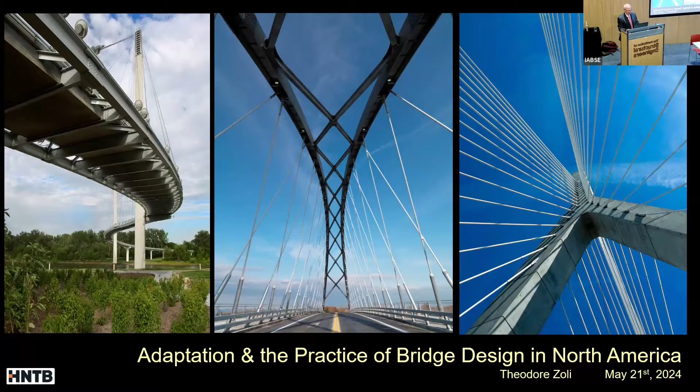I'm also going to go off course here a bit in terms of thinking about what I mean by adaptation. For me, I got fascinated by this idea that we could use evolutionary models to think about technology, and in particular to look at artifacts. So this is the idea that maybe a bridge is an artifact, and look at how those artifacts evolved over time and what that means.

In the biotech space, obviously, especially with genetic algorithms and actual genetics, they think a lot about how to do this in a slightly different way. This sensibility about a fitness landscape and climbing a mountain to get to higher fitness is at least a metaphor that I think we can adapt.

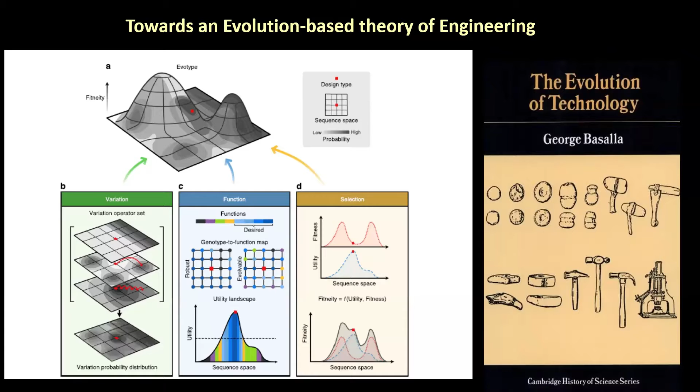And maybe this is the strangest part of what I'll have to say. So one is this idea that the mountain keeps moving, and so how well adapted are we if we're trying to climb the mountain and the mountain's moving out from under us? There's also this sensibility about Rogers' paradox, and I'll use these words interchangeably. But there's this idea, and the paradoxical part, is this idea that there's some equilibrium.

If the environment changes, and this is just an X-Y change in environment, you have learners who are adapting to what that change is, and you have imitators.

So this idea of learners, you can think of interchangeably as innovators, and then imitators. It's a way of thinking about cultural transmission. In this sense, I think the cultural transmission part is really important. How do we choose good ideas and then reuse them?

So I want to highlight where I've been both, I think, a bit of an innovator, but also a bit of an imitator, and I think both are equally important in some sense. I'll try to walk through that in a way that I hope makes sense.

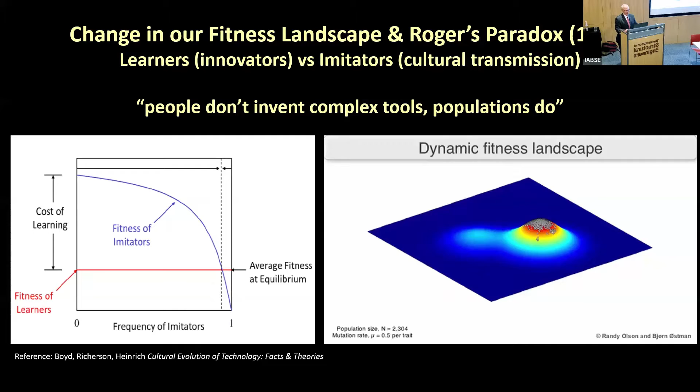The other challenge for me is that, this is not in Stuart Kauffman's model, this is a sensibility about how the fitness component depends on multiple categories or multiple other components. So if they're not independent, then you have this problem of figuring out which space you should be headed towards. And obviously, if the space is changing, it makes it even more complicated.

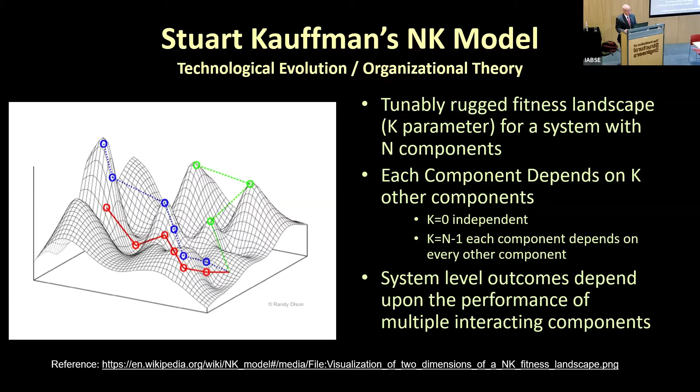I want to argue here that I see really two slowly changing landscapes that have been the focus of my career. And one is, when I say slow, I'm talking 100 years, more than a generation. The length of the artifact, the service life of a bridge, is the way I like to think about this.

So I would say 100 years ago or better, the thing that drove decision-making was primarily cost. Certainly not safety. We had many collapses per year with many deaths. Certainly not longevity. Many bridges lasted less than 10 years. And environmental impact, I think, was not consequential at all at the time.

And I say 1980s to present just because that's when I've been practicing. Safety has obviously changed dramatically. Safety and cost, I think, are still the largest drivers. What's changing right at the moment is environmental impact or sustainability, however you want to think about that term. So I'll focus quite a lot on safety and cost and how to get there.

Now, for me, cost is underpinned in terms of what's changed, and also slowly changing, is that materials were the primary cost 100 years ago, and now they're not even a third of the cost. I've gotten agencies and even the steel manufacturing industry and the concrete industry to crunch numbers on this, and it's absolutely clear it's maybe one-third or less of the cost.

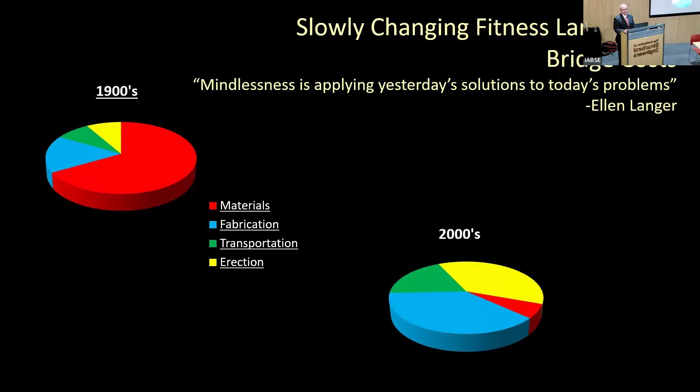At any rate, I spent a lot of my career not optimizing for materials, actually optimizing for the opposite of material costs. So that's been maybe an underpinning. And then it always bothered me.

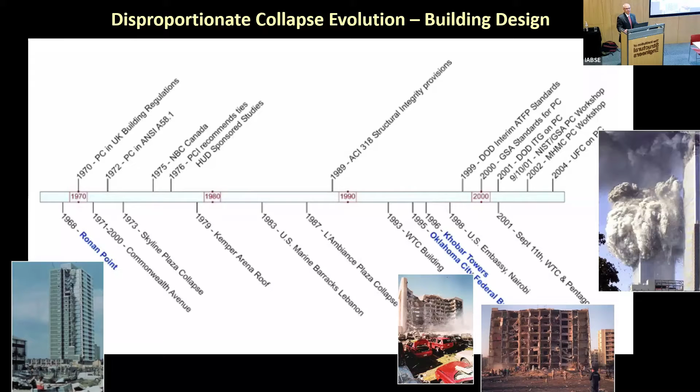Speaking here and thinking about the Ronan Point collapse and progressive collapse in buildings, I'm really a product of September 11th in terms of my generation's practice. And yet these are all buildings, and we still, as of today, don't really have progressive collapse guidelines or disproportionate collapse, as you say here, in U.S. practice.

And it's funny because we've had exactly the same collapse history in bridges as we've had in buildings. We've just somehow called it something different. So when I started my practice, I really was concerned about why we don't have progressive collapse guidelines. Why are we designing bridges where we could have one component fail?

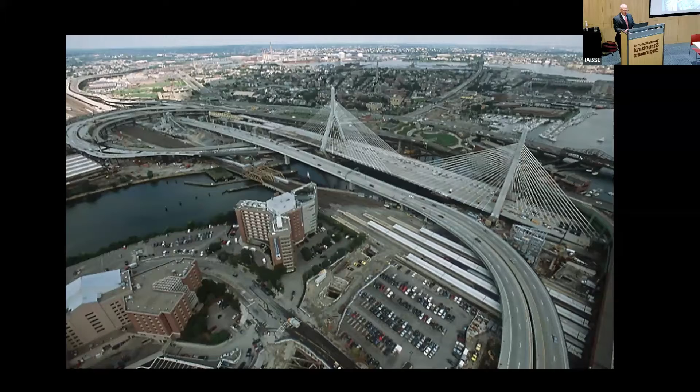And so now it comes to the formative beginnings of my career, and some of this will seem a bit strange, I think. This was a project in Boston where Christian Menn was the conceptual designer, and I was the engineer of record. There's maybe two or three important takeaways for me, at least in this.

One is the cable spacing was so tight that it was easy to tolerate the loss of a stay, perhaps even the loss of two stays. And this was just a choice, right? So this cable spacing is maybe 6 meters, the tightest cable spacing of any major bridge I've ever designed. Yeah, it's a strange idea.

And then maybe the other piece, and this is quite a mess if you imagine, right? You have a cantilevered walk, this two carriageway cantilevered bit, and you have then much more force in these cables than these cables, which produces obviously a lateral force this way, which wants the bridge to go to the left, and it also wants to pull the tower over to the right, and in this case, twist the tower.

So the one bit of cleverness here, I think, that no one will understand except a bridge engineer, is just by moving these two cables just an inch or two this way balances the forces, the torsion in the tower, the lateral bending in the tower, and minimizes some of the lateral bending in the deck.

Yes, so these subtle things I thought were fascinating, right? That you could play this game. And so since then, I think many cable-stayed bridges have taken into account that just a subtle change where you're directing very large forces can create quite interesting opportunities to, let's say, misbehave.

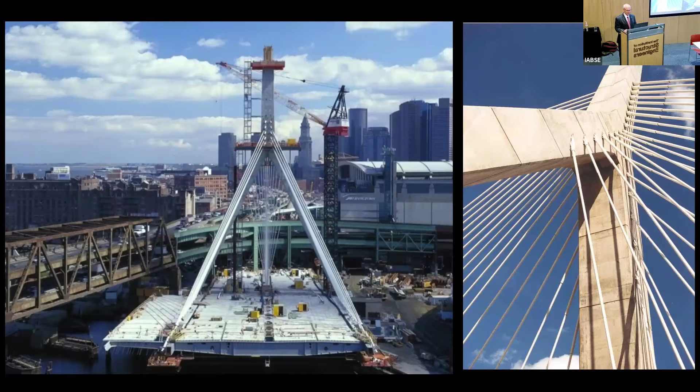But the real story here is what a mess this project is. We were building this cable-stayed bridge underneath an existing double deck structure, where the columns of the double deck structure went through the side spans, and you can see the cables. It's a little hard to see, but the cables extend underneath so that last cable almost hits - it's within 6 inches of hitting the existing girder.

So this bridge had to be built, and then the double deck bridge removed. We had to build a hole for that column and remove the column later, and so on. To me, there's something fascinating about this being an early part of the work that I did as a practicing engineer. It's a little bit like trying to build an automobile in your closet - there's just too much going on and not enough places to do it.

But it also gave me a sensibility about how critical a construction strategy is and how it should be baked into the engineering. A lot of what we changed, even in Menn's conceptual design, was to try to get this to work a bit better. And ultimately, I think it's a successful structure.

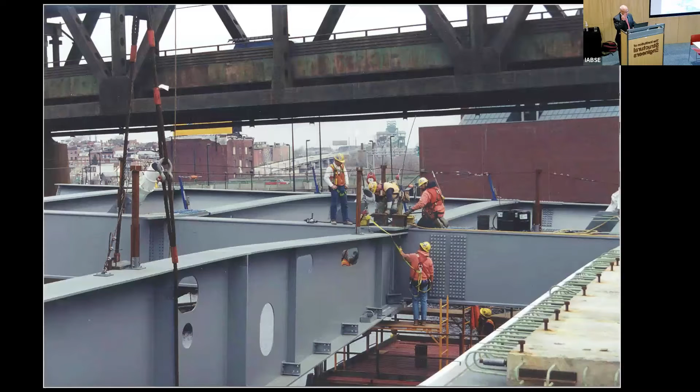But the other thing that it instilled in me, and this is something I didn't appreciate, was how much forcing it took to install some of these components. The cleverness of erection engineers in order to build this bridge was far more clever than anything we did in the design. That's something that stuck with me - I really had to be a better structural engineer. I had to understand erection engineering in a deeper way and really start to integrate the erection strategy into the design. It's a theme that I'll come back to.

So the other piece was one of safety. People would probably not recognize this, but only in the US would we say tied arches are not permitted. In 1978, we had some problems with some welded tied arches, and the federal government said, 'Thou shalt not build tied arches.'

And so I grew up in that "thou shalt not build tied arches" sensibility, and yet this particular crossing of the Ohio River really wanted to be an arch in many ways. It could have been a cable-stayed bridge, but for reasons that are historic, this island really couldn't be touched.

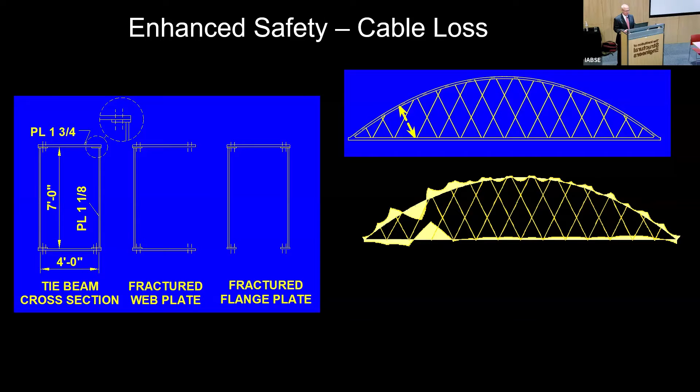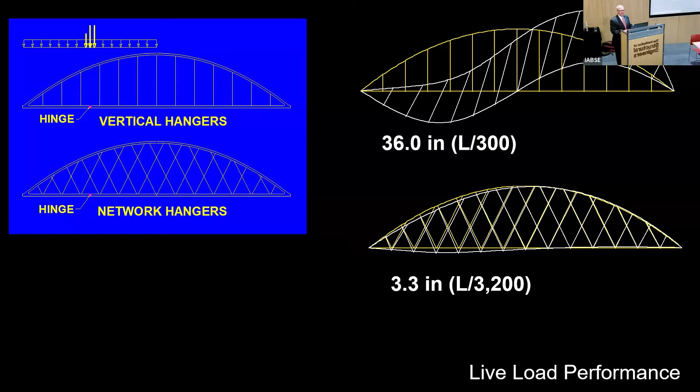And then, not for nothing, you look at the comparisons under live load, for example, and it's just dramatic. You have a system that is 10 times more efficient, whether it's displacements or moments. And you wonder, for me at least, how did we not find this system earlier, and why were we ever designing arch bridges with vertical hangers? Of course, it was found earlier, and I didn't realize this at the time, but Per Tveit, this little-known Norwegian, ended up as a professor, but he built two bridges.

The backstory on this is cute. His mom knew the Secretary of Transportation in Norway, and she said, "My son's got his PhD on these things that make no sense to me. You should let him do one." And I guess in Norway they said yes, so he did two network arches. Then he became a professor and didn't do much about network arches for 30 or 40 years.

And then he called me when he saw Blennerhassett. He said, "Well, how did you find my stuff?" And I said, "I didn't know your stuff existed." He said, "Well, what were you?" Because his argument was for slenderness, that you can make these very, very slender, and these bridges are extremely slender. And I was making exactly the opposite argument, about safety.

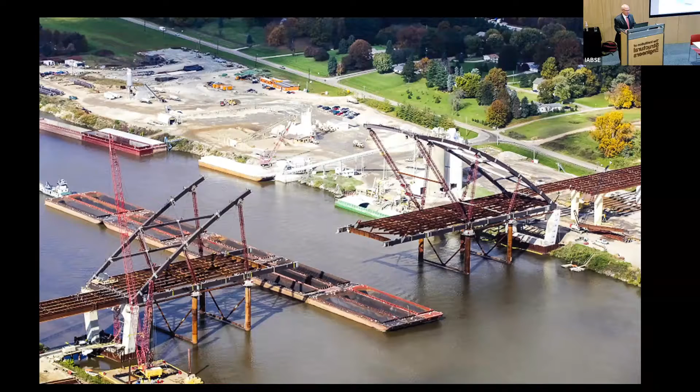But one other theme, and this goes back to really the appreciation for the erection engineering. This is another problem I have with arches that I'll come back to over and over again in my career: they're hard to build. The engineer who did the erection engineering for this arch designed everything, all of the temporary stays, all of these jackable struts. The guy was an absolute genius. You would never, in talking with him, know how much he knew about arches, but it was absolutely fascinating to me.

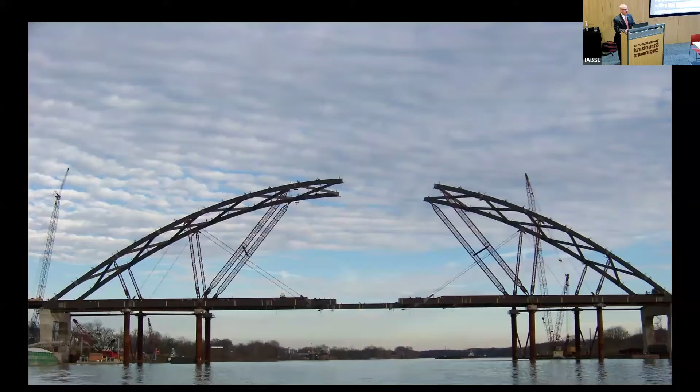But what's always bothered me is you look at all of these temporary structures, and this I think of as lost dollars. These are dollars that don't go into the final structure, they go into getting the final structure there. And when we think and talk some about sustainability, I don't think we measure these things clearly enough. So yeah, these I think are formative for me.

So then my argument here, it's a very simple one, and there's a few of my former students in the room who've heard me say this: for me, it's just optimizing for fabrication, transportation, and erection, with very little thought to material optimization.

And so then I went on a bit of a spree of taking over-budget pedestrian bridges and redesigning them for roughly half their cost. This is another thing that surprises people, that design can mean a 50% reduction in cost.

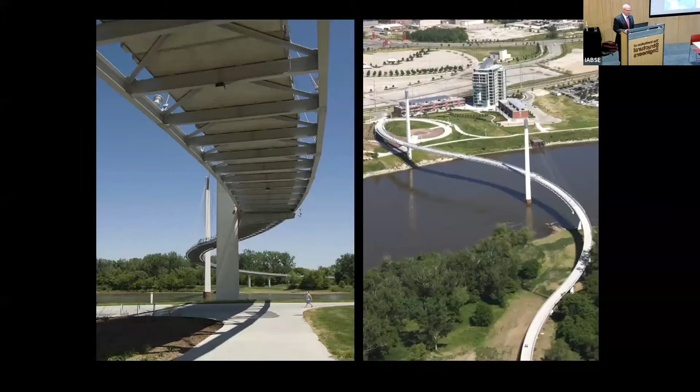These are examples of those three that I'll go through quickly. One's a sort of strange idea about a curved cable-stayed bridge, an S-curved cable-stayed bridge. Maybe that's not so strange, but I think in the way we achieved it. This was a design-build project, and it used the model of: we have $22 million to spend, give us the best bridge you can.

We were able to give them the bridge that was bid at 47 million. We gave them exactly the same alignment, a very similar bridge, but with some fundamental differences. The fabricator and contractor working had never built a cable-stayed bridge, and the fabricator said, I will not do a curved bridge. So the beauty here is there's not a single curved member anywhere on this bridge.

Then a bit about how we saved so much money. The original design had a single cell box, asymmetric cable arrangement, inclined towers, and even in the middle of the country—this is in Omaha, Nebraska—wind governed. We were able to use a section with much more drag but much less depth. Just in the foundations alone, we saved half the cost. Ultimately, this bridge was delivered very successfully.

But I come back to the 'no curved' part, and now you'll see the sensibility about erection. I wanted every one of these pieces to be exactly the same, and for there to be no stick framing. It's a strange idea, right? That piece has to be the same piece, and there can't be any little pieces to pick up. Little pieces to pick up is hook time—it takes a crane operator to pick something he shouldn't need to pick up.

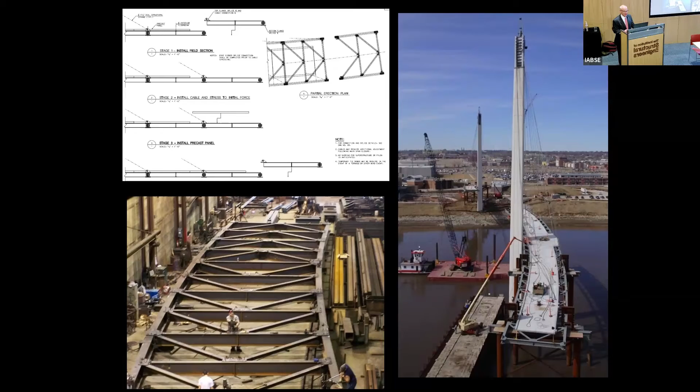So I started really thinking about how to make a piece that's erectable. If that piece is exactly the same—this is a pie-slicing plan—then every single one is the same. This becomes something the fabricator was very happy to do, and it was done very cost-effectively.

The other piece of this—Verlinger and I had a little discussion, he taught one of my classes, and I think he wasn't convinced. My argument on curved bridges is the tower belongs in the CG of the section. It's absolutely the only place where the tower can be vertical and behave just like a tower should. If you incline the tower, you immediately get a much more complicated set of circumstances.

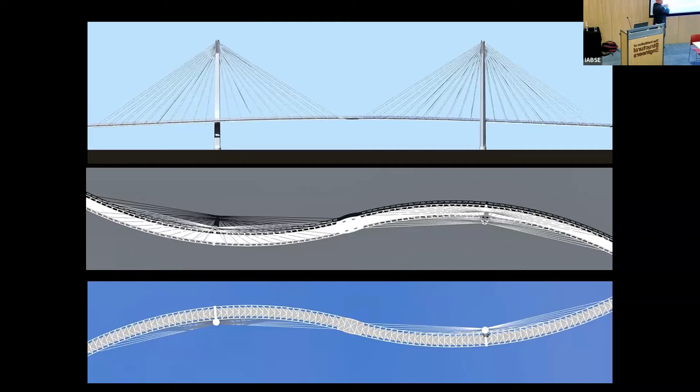The other thing is that this wants to close the curve, right? But it's easy to build the curve at a bigger diameter. This is a bit like the Zakum problem all over again—you can pre-build the banana slightly wider than it needs to be, and it ends up in the right place. But the real advantage in all of this, with a vertical tower and a quite simple foundation construction—no cofferdams, a single drilled shaft—is what really saves the vast majority of the money.

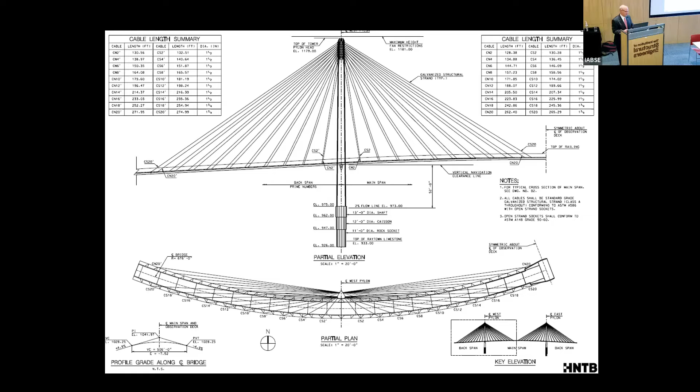So then another one is this classical problem of a bridge over an interstate. In the U.S., we found nice communities, and then we built 8-lane divided highways through those communities. The neighborhood is here, the high school is here. Instead of having a bridge—even the abutments were built for this—the bridge was never built. The head of the Department of Public Works had been trying to get this project done for his entire career.

The bridge was designed all in concrete, and it was twice the budget, so the project had to be canceled. He flew out and met with Les Robertson, one of the guys on the wall, and said, I want your ideas on how to do this, but I only have this much money.

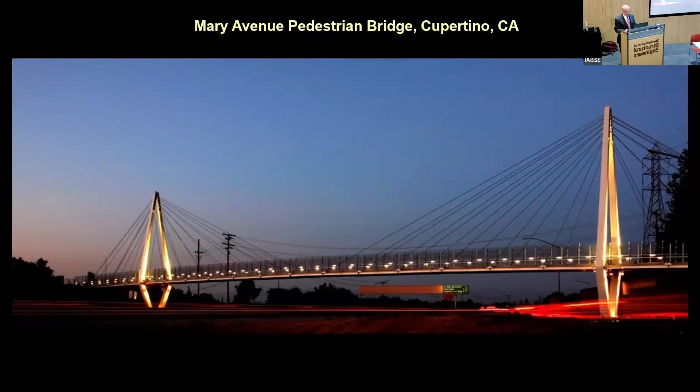The concrete tower schedule was 2 months to erect. This took 2 hours. So you get the idea - more expensive materials, maybe more fabrication done off-site, but this is the sort of thing you can do. For me it's a funny thing, right, since this is a high seismic region. The connections happen in places where there's very little movement, so I'm not too worried about that.

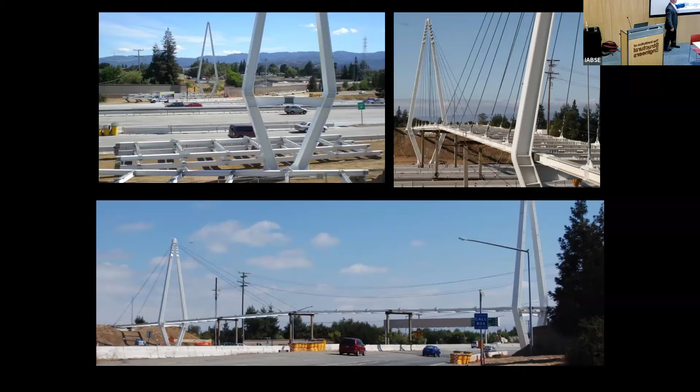But that's not the whole story. It turns out in this divided highway there were places where I could drop false work on top of barriers. So the bridge pieces are all the same, erected to span from false work to false work without the cables. Then it's built high and the cables are installed unloaded. This is something I wonder why we never did before - if you're installing on false work, just install things high so it's easy to install the cables, and then let it go. This is exactly the way it was done.

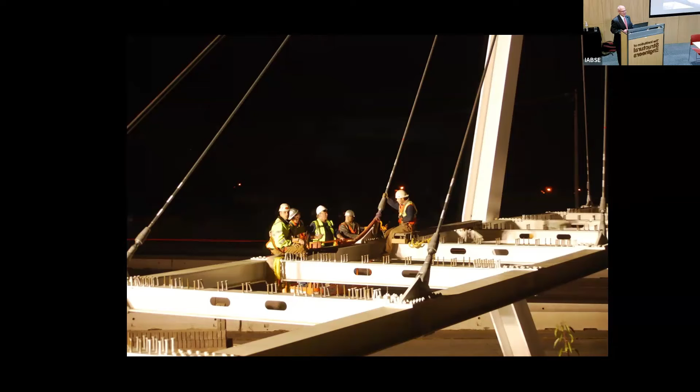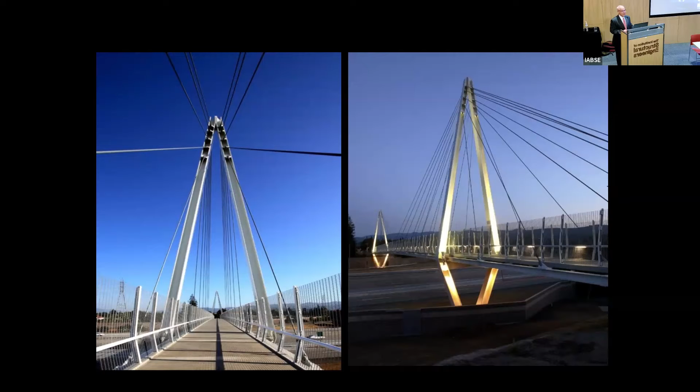When projects like this are successful, like here the Department of Public Works putting in the last cable - the entire bridge was complete with about 80 hours of hook time. You could only work at night for 4 hours, so it was really only 20 nights to erect the bridge in its entirety.

The last one here is even stranger still, and has something to do with the fabrication piece. This was an over-budget project, for a zoo designed for very young children, and the bridge in the redevelopment of the zoo was called the Bent Bridge. So I took that on as inspiration - the idea was, could I make an arch bridge out of just 2 rolled sections?

This is obviously Cor-Ten steel, so you don't have to paint it - a perfect place to use Cor-Ten steel in the middle of California. But the challenge is you can't just go to the store and get Cor-Ten rolled sections - you had to have a minimum order, and the minimum order was 20 tons. So I got 20 tons of steel in these 2 rolled sections.

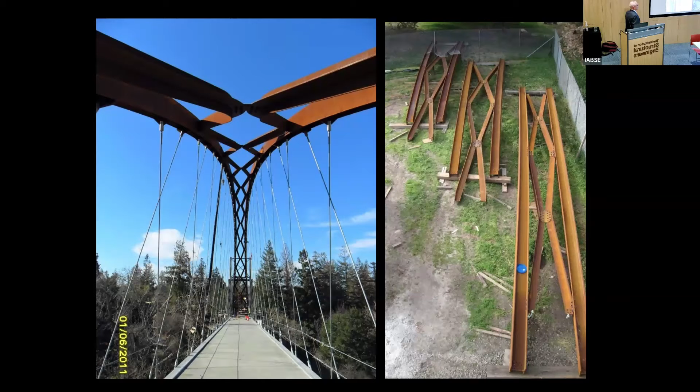There's some strangeness about this bridge - obviously everything's bent, but these are W18x76, 18-inch T-beams cut in half and bent. The arch ribs are a W14 by 120, that's it - you go to the fabricator and order 2 pieces of steel, and the tie girder is actually the same WT. So in a sense it's a strange operation, but a very successful project.

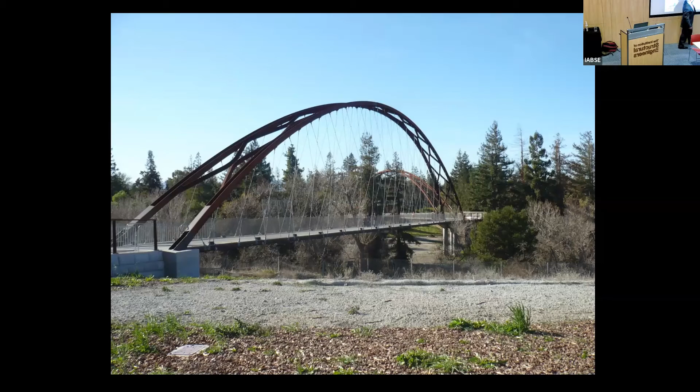These 2 arch bridges were built for less than $3 million. They're quite slender, and this is where I'm also partial to no railings in these circumstances - the railing is a little hard to see, but it's just a cable and mesh, and the railing is effectively eliminated. Railings, it turns out, in pedestrian bridges - I've done some where the railing costs more than the bridge does. It's preposterous. So part of the reason for close cable spacing was to eliminate the expensive railings.

Now we'll go in a completely different direction, because I think oftentimes we get up here and talk about long bridges and these iconic projects, but in my view many other sorts of projects are much harder, and in this case, much less safe. So this is a bit about how unsafe construction can be. The story here is a 2-track bridge - we have to maintain train traffic on one track while we replace the other track right next to live traffic.

So this is one where something goes wrong and everybody dies - the 1,000 people in the train die and they fall onto the 1,000 people in their cars. And you can imagine, right? So this is one of these circumstances where it's really probably the riskiest project I've ever done.

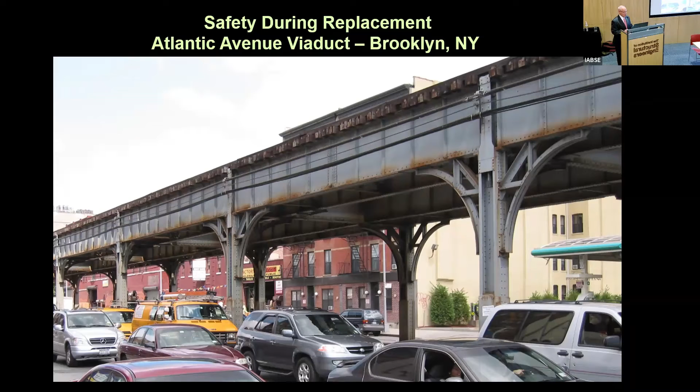And I know this is being recorded, but my firm was probably not paying as much attention as they should have when we pursued this project. So this was also a design build project where you sometimes have less control.

So the story here was that what we came up with, which I think in many ways is not ideal, was ideal from an erection perspective. So the owner expected that we would do 2 spans a weekend - all in a 55-hour weekend outage.

You have to have the rail back up, so 2 trains are going in both directions back in rush hour. They were very complicated spans, and the idea was that we would do 2 spans a weekend. With the system we came up with, we were able to do 10 spans a weekend.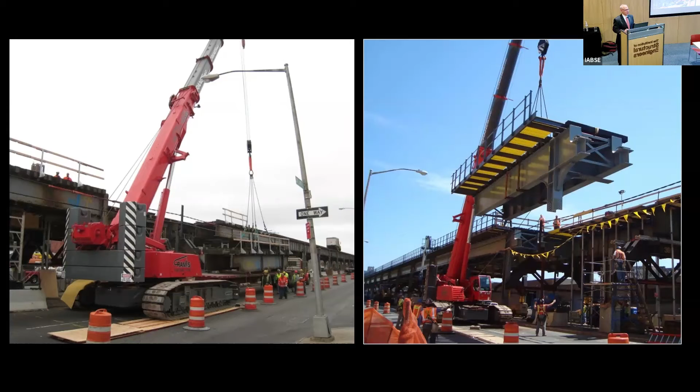So you imagine every weekend was your risk. We had 5 times less weekends, less risk than anything else we did. This is another thing I think about, even in terms of sustainability or how we think about the work that we do - maybe the time where we're unsafe is really important and consequential.

We did have daylight, and we tried to get as much done as possible in daylight. This is where the spans are really ready to go. But most of this was done at night, and this was Kiewit, who just did a fantastic job.

So just to describe the system - these are in-span hinges, what you would never do, I think. But they're in a circumstance where we're relying on the flexural capacity of the columns. This was actually not in the design - in the design, we were supposed to retain the columns.

And the argument I made was that I'd much rather make this splice than this connection to existing. And so that was the other piece that made all the difference. The other part that we didn't know about until we really got into the job is that these are pinned at the base in any case.

So really unstacked - this is all early 1900s structure. And so this sensibility about building quickly and safely, I think also - it's not so much the final structure, it's getting the final structure there that was the risk.

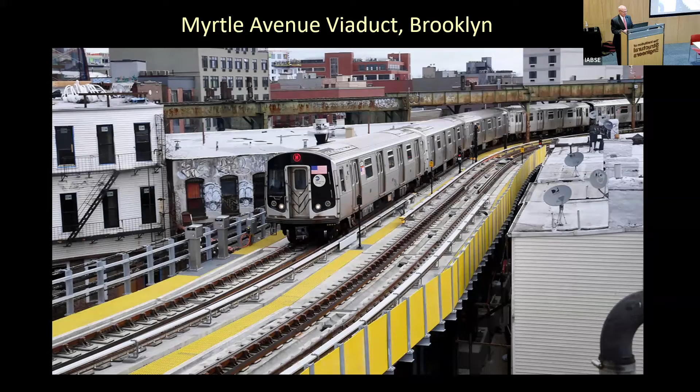And then with this idea of constructability first, this is probably the first bridge I designed around a crane. So this is a nasty New York problem - they couldn't figure out how to do it. When we interviewed for the job, I said, if you don't do it this way, I'm not interested, hire somebody else.

And the problem here is that we're replacing this section of viaduct, between houses - there's no way in, no way out. It turns out this is an elevated structure with low clearance, and I couldn't even get a normal sized crane in.

Yeah, only in New York. You have maybe 4 meters clearance, and that's it. And so the logic for me was that we should use a pick and carry crane.

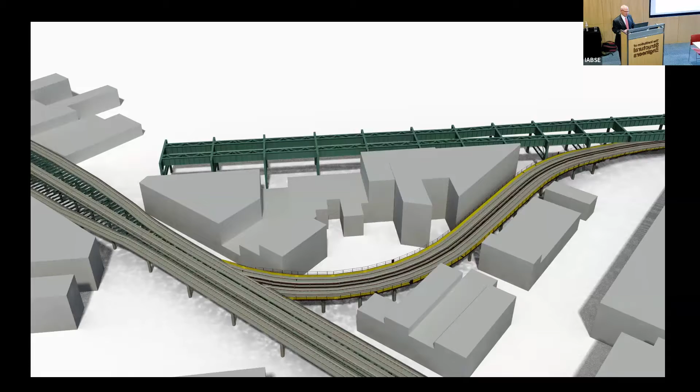And I thought for the life of me that there's no way they would have built this originally like this - it's just too silly. But in fact, they did. And that's why this stretch between the 2 buildings was all built in concrete, which was a nightmare to get out, and there was no reason to put concrete back in, and I'll get into why.

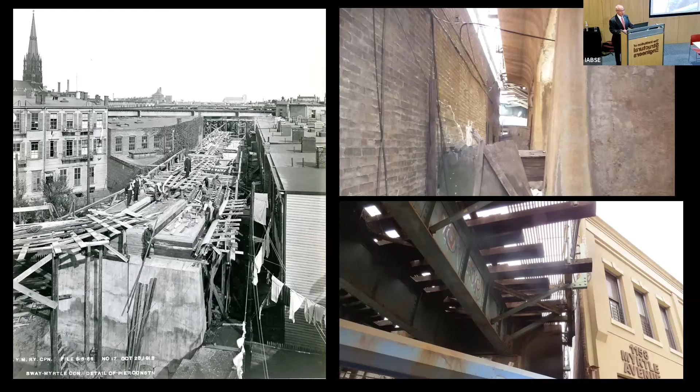The other piece was that it was right next to - when I say right next to buildings, commercial buildings and houses that were active - it was right there. And then, of course, we have all the power and systems that we had to support temporarily.

And even just the little mini suspension bridge we had to build to support the cables, because we're still operating the trains that are connected. We're dropping out this section, and the trains are still operational. So you get the fun.

So then designing around a crane - these are cranes that were developed for tunneling. And the reason they are useful in tunnels is they're short, and they can pick loads up and carry them. So these are pick and carry cranes - you can spin the load around.

And so these are hydraulic telecrawlers. Before these existed, I don't think we could do this job. So this you can pick up, you can drive under the bridge because it's only 3.2 meters tall.

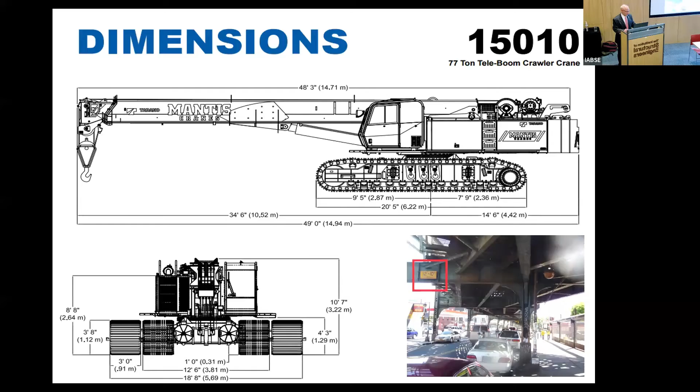You can drive under the bridge, extend the tracks, pick the load up, carry it around. In terms of cross section, this is also a stupid cross section—for a two-track bridge, you don't put a mid-span splice in the floor beam. It's nonsense. But in terms of making the pieces over the road transportable, it's brilliant.

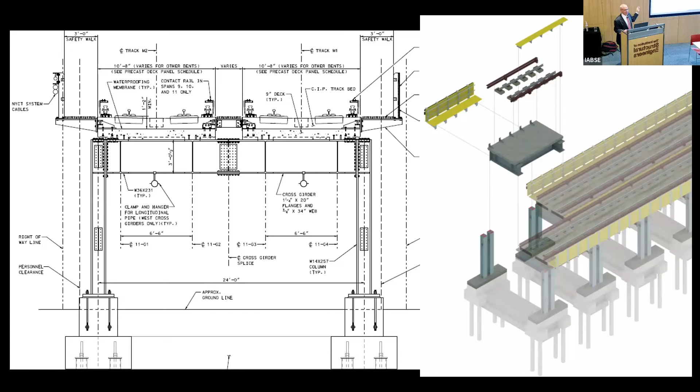All of these were brought in. In New York, there's no place to store anything, so these were brought in live. As we were setting pieces, you bring them in, pick them up, carry them in—and when I say carry them in, I mean carry them in. You have to pick up with a crane, drive them into their final, and then work your way out. So you have to work your way in to demolish and work your way out to construct.

The beauty of this as a system is each piece is sort of self-supporting, so you can actually pick up each piece independently and then connect them together. In terms of construction, quite effective. There's the end product—it's bizarre a bit, I think, but it's interesting.

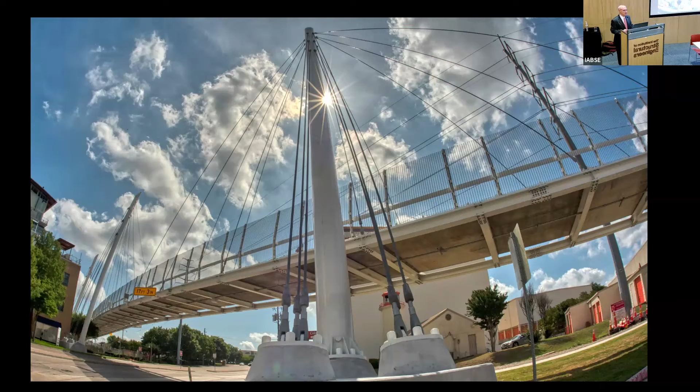Maybe I've taken redundancy to a logical conclusion, but we were trying to use all the same cable. This is another thing I think we don't do enough of—efficiency. Why would I have different cables? I just used the same cables, and I needed six of them for backstays, if that makes sense.

Now a bridge in my backyard, near where I grew up in the woods on a road job. This was quite an interesting moment—we unfortunately had to close this bridge because it was unsafe, and then replace it. There's nobody up in this part between New York and Vermont where I grew up. This bridge was only used by 3,500 people, and I think 3,500 people showed up to the public meetings. There's really nothing going on there.

What's interesting is many of the people—my name is the same as my father's and my grandfather's. Many people had worked for my grandfather in the road building days and knew me. I think they half came just to see what the hell I was talking about.

So it was one of the most environmentally sensitive sites of anything I've ever worked on. Pre-Revolutionary War—probably a bad topic for this audience, but French and Indian War is a better topic—and then 7,500 years of Native American history. In fact, when the University of Vermont went out, every shovelful had an actionable artifact on the Vermont side. The entire site was basically a hot spot, so we had to build along the same alignment.

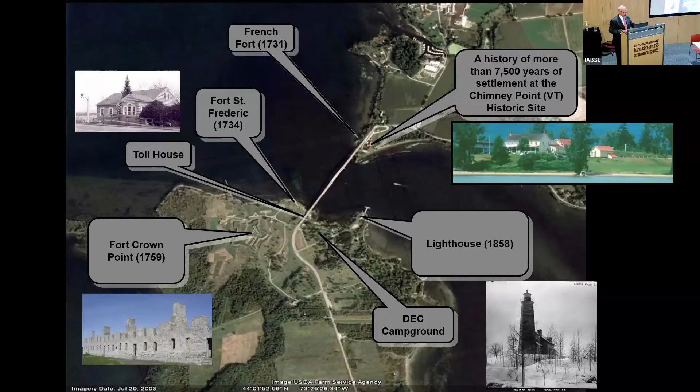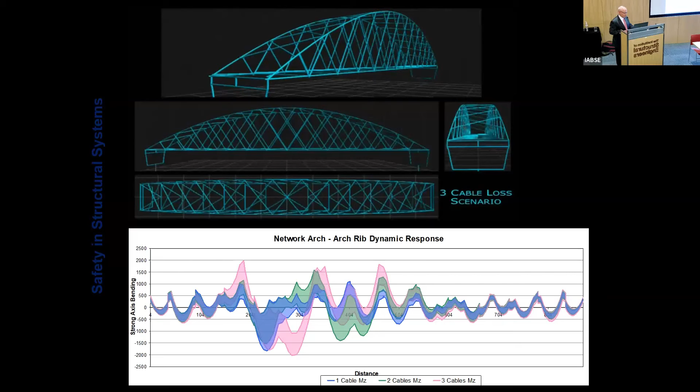This is a video—not important in itself, but I got very interested in how many cables I could lose, and I'm happy to say that with tight-spaced cables you can lose on a network arch—you can lose 3, maybe 4 cables while still maintaining live load. But the more important thing for me was this idea about construction.

This was really baking construction into the fundamental characteristics of the design. This was an emergency project, so we did this design in 10 weeks—a really aggressive design schedule. You can see the contractor did exactly what we had come up with, even though this wasn't design-build. Basically, this is just the use of a strand jack, so hopefully this plays.

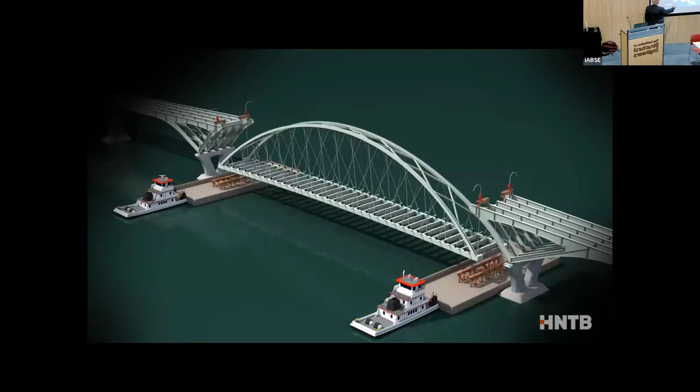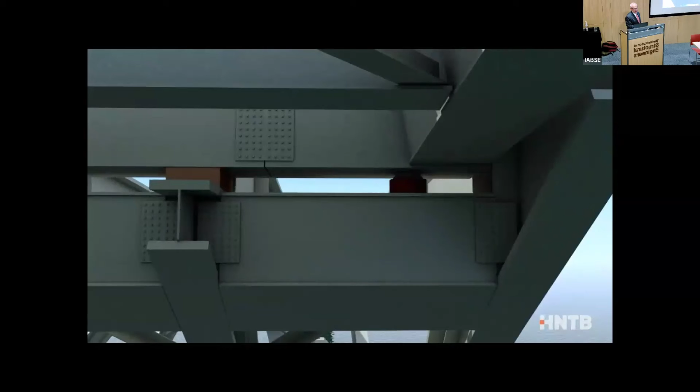Just to be clear on this distance: this is a landlocked lake, so I know the lock size, I know the barge size, I know what the geometry has to be. This is just the lifting of the bridge between two what we call delta frames, and this was the way the bridge was connected. As a strategy, this was incredibly effective, and for me it answered the question of how to build arches without falsework.

So in this case, it's a landlocked lake. You can't get a gigantic crane in to do the lifting. I don't want any false work. The soil conditions are terrible. How do you build an arch where you're using the approach bridges as the lifting device? So in this sense, the approaches are the crane.

And then for me also, I really got interested in this distance as related to the barge size. So getting into a little bit of barge logistics. This is another thing. So now I've done a lot of float-ins. Barge logistics are a good part of this.

And then finally, this idea of network arches is really no different than lattice trusses. This is going back to when covered bridges where I'm from are in terrible shape. Usually you can reach your hand in and pull rot out, but they seem to stay up. Part of that is because of this redundancy with lattices.

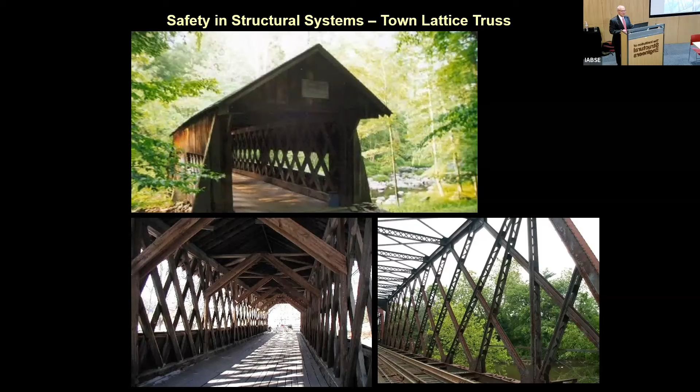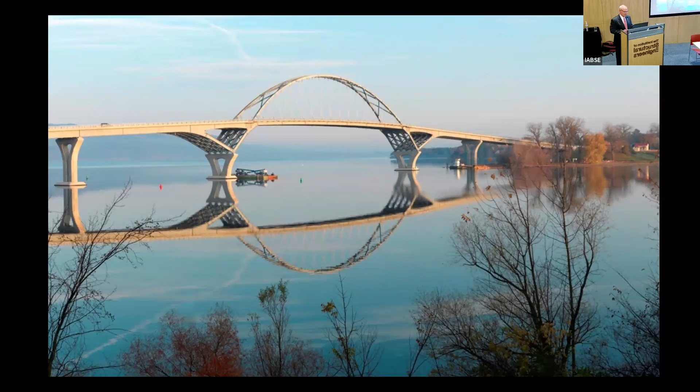So in the end, I think this was a project that, even in a very significant emergency, integrated construction into the design. Really trying to figure out how to build arches more effectively is something that I think was fundamental to the way I think about practice.

And then, not for nothing, you get the theme here - this is another set of arches built around construction equipment. The strategy here was to use, we call these Mi-Jacks. They're basically gantries like you would use in a fabrication shop, but they're wheeled so they can wheel around. This bridge was all designed based on using these yellow things.

And you can see the temporary support. So the tie girder was designed to support all of this, even the crane, and the biggest pick that these gantries had to make was the crane that we needed to erect the arches. You can see that crane in the middle. So this is really - the crane has to pick the crane, yeah?

And it's a strange way of thinking about design, but I think there's that leverage that can be had in terms of developing new ideas, and that's where the innovation is.

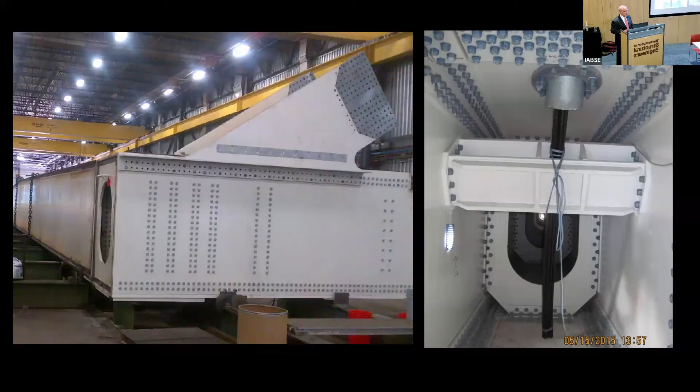We even used the gantries to take down the old bridge, and there's the picking of the crane, right? So I'm not making that up. Everything was designed around the crane that we needed to pick the arch pieces up into the final configuration.

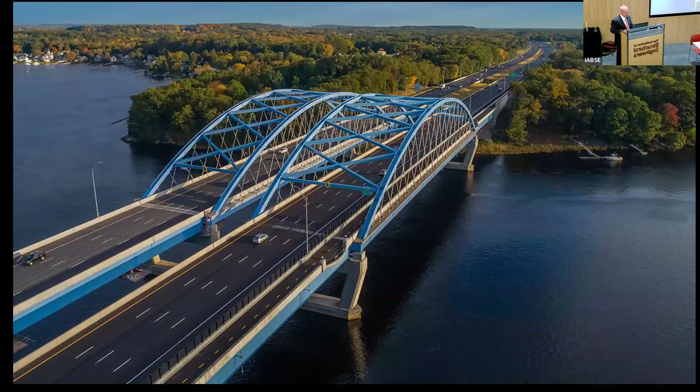So now a bit about - this is, I think, a finding-stuff-in-the-backyard sort of approach to bridges. This was another collaboration with Menn. I don't think he, and even Jörg Schleich, were completely happy with this.

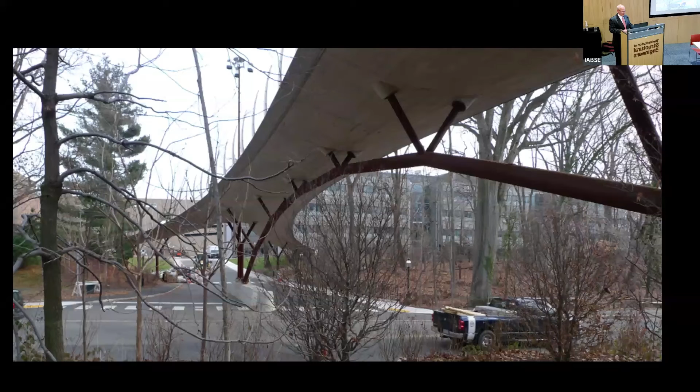And Jennifer will be - so one of the things I did was I used bent connections as opposed to castings, and so all of these pipes are bent. But actually the more interesting story is that Christian Menn wanted weathering steel, and weathering steel pipes in the sizes and strengths that we needed basically didn't exist.

So we started searching around, and the general rule in the United States, if you're looking for steel, look in Western Pennsylvania. Somebody will have stocked some steel there, and I'm not making this up. We found some Japanese steel and Corten steel in Western Pennsylvania, and I took everything he had and said, okay, we're going to design the bridge around what available materials he had.

Yeah, so this is, and of course, this is on Princeton's campus, which is very fancy, and that's maybe the proudest I am of this - that this fell-off-the-back-of-a-truck sort of steel is fundamental to the design itself.

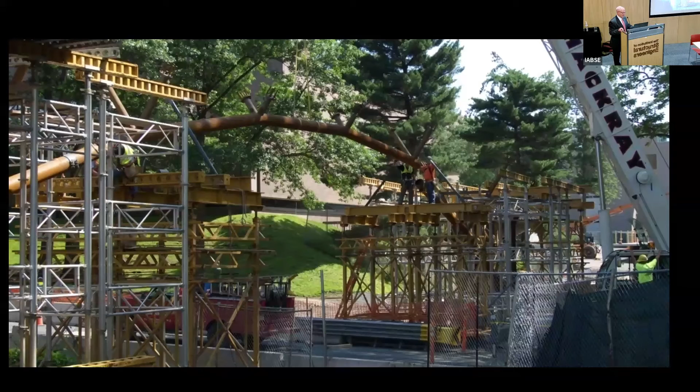And then this was a fabricator who had never fabricated with pipes, and he did a fabulous job. And then one of the things I got scolded for, and I like to get scolded from time to time by Menn and Jörg Schleich, was that the joints, the connections, had to be made in the field.

Because these pieces aren't - now you know me, right? This is not over-the-road transportable, so that splice happens. You can support this on a truck, the next piece you can't. So that's where the splice had to be.

And I left the splice, I didn't have them clean up the splice. I like to show where the splice happened, and that apparently isn't well thought of. The other piece in this for me is that this is pure graphic statics.

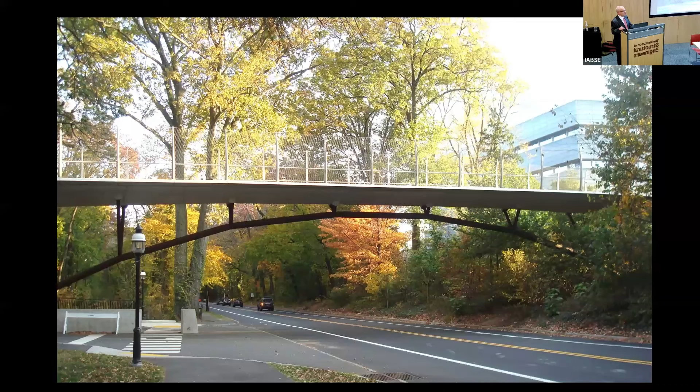This is a bridge that only graphic statics makes sense for. You've got a widening—if you think about the roadway width, the pedestrian walkway width is widening. It creates different loads, and those different loads create different reactions. The arch shape is not clear, but it's clear in graphic statics. So this is an example where graphic statics is the only way to design something like this. There's no other way to figure out the shape of the arch.

And so it's also something that's a little bit of a throwback, and I think has a vestige of my earlier training.

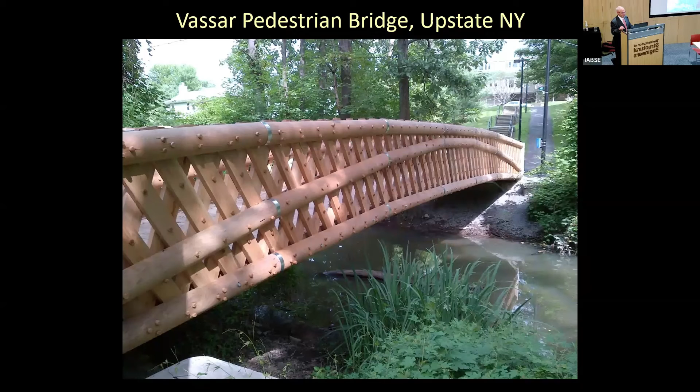So then this is sort of me ripping off things, right? This is a rip-off of what's in covered bridge terminology—a Town lattice truss and a Burr arch. For me, this is made out of locust, so you don't need the cover. And this was for Vassar's campus, but this is the same idea.

Even this, it's about transportation and erection, right? It comes in one truck, can be lifted with one crane and set. Yeah, so that's where the efficiency is. The rest of it is not meaningful.

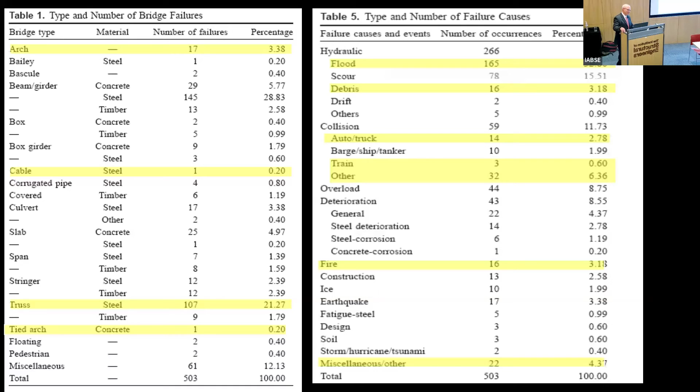And so I'm coming to the end here. People who have taken my course term it the demonization of the truss. I feel like trusses are failing at 20 times the rate of any other sort of structural system, and I feel like we engineers—if we have one part, one connection fail and the bridge ends up in the water—we've done something horribly wrong.

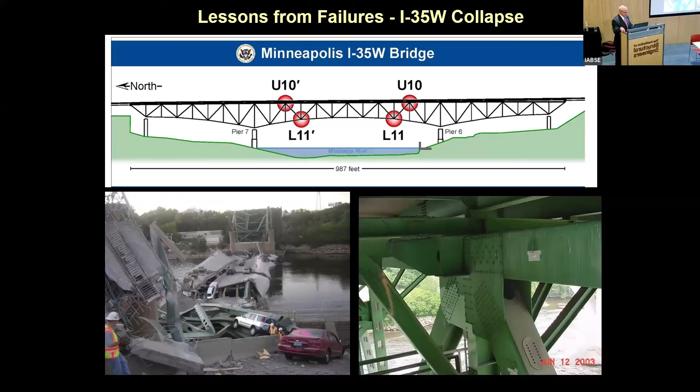So when I have to design trusses, it's always in the back of my mind that my students are giving me a hard time. And so I really stretch to try to find a way to make trusses really intrinsically redundant, and using I-shapes in the strong axis was the idea.

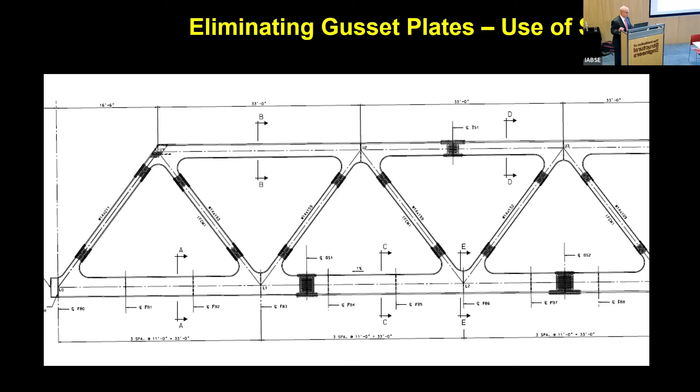And some of this really goes down to fabrication. So I got very interested in using splices as opposed to gusset plates—how to fabricate trusses in a new way that takes full advantage of the material and reduces waste. And in a sense, this is sort of a sustainability thing. Plate comes in slabs, and you can cut Mickey Mouse shapes out these days with plasma cutting. Can I cut shapes and then use the same thicknesses?

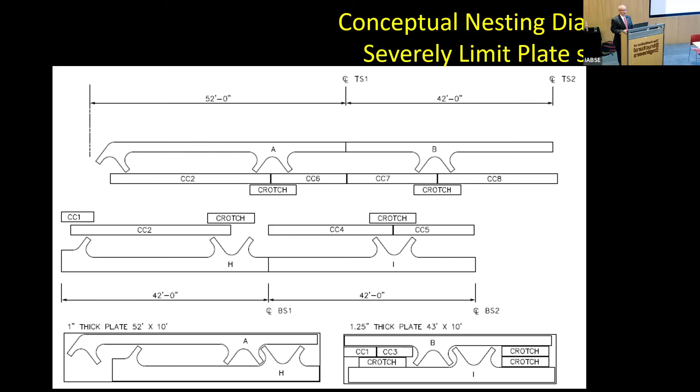So this is a truss bridge that I think is just about the welding. That's not very interesting, and the plate bending is also not very interesting. Here's the prefabrication.

To me, the idea here is that you can build a truss this complex—all three trusses that I'll show you in a second only used 2 plate sizes. Yeah, so this is absolutely efficient.

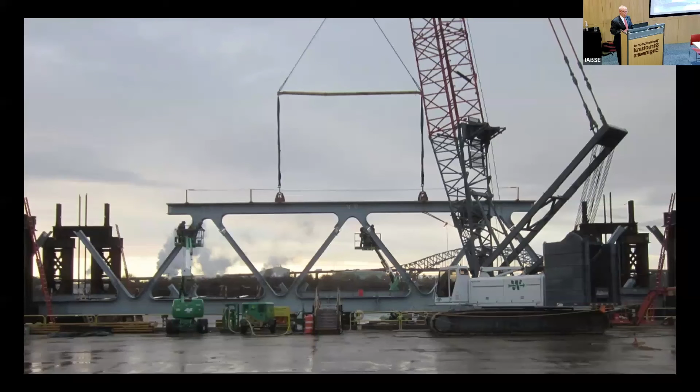And the one thing I forgot to say is this is a movable bridge, right? So the one thing you pay a huge penalty for in movable bridges is weight. And we were 30% heavier than any of our competition, even though we won this project, and we still won. So this is a very clear indication that actually fewer plate sizes is probably more efficient and more sustainable, and certainly more cost effective.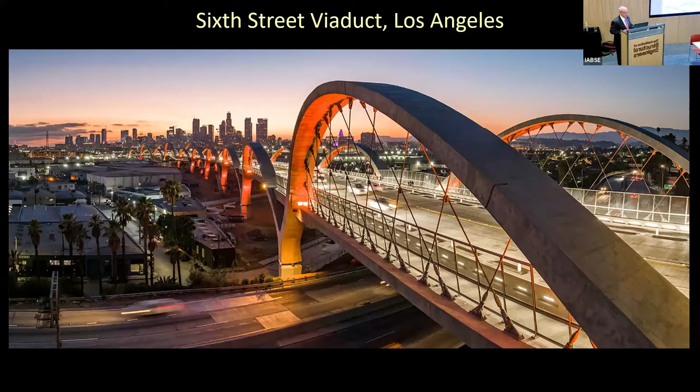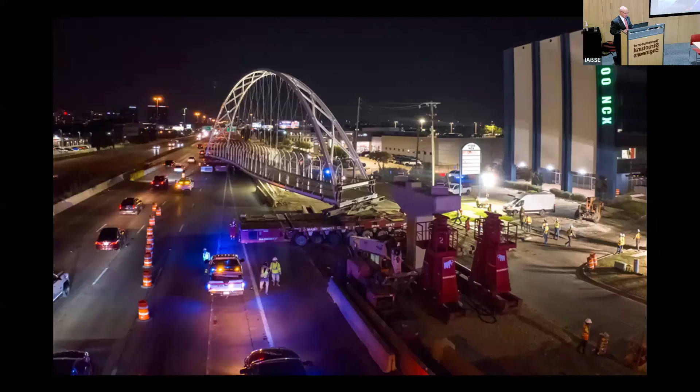So a little bit more—I laugh now when I think about how arches are not allowed, and it seems like half of what we do these days in the US is arches. So this is a set of concrete arches on the West Coast. We just finished a pedestrian bridge, a sort of odd-shaped pedestrian bridge. I've always wanted to do a skewed arch because I think they look funny, and they do look funny. This was one where we're moving the bridge over traffic—this is Texas, where traffic never stops. And yet, I think it's a very strange-looking bridge, right? I guess that's a bridge only a bridge engineer would like.

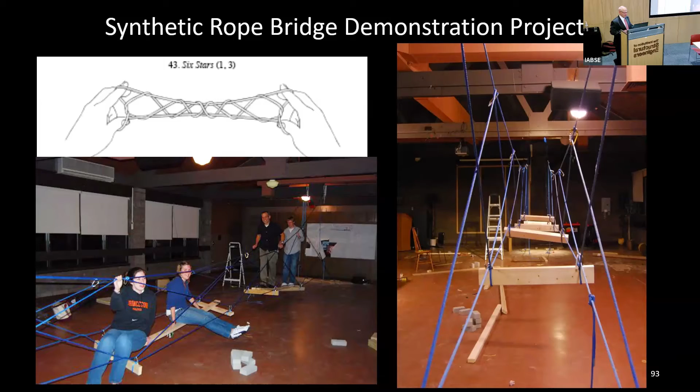So then rope bridges—this was around your time, Jennifer, when we had students making bridges. This is out of a cat's cradle idea, and I got the sensibility. Same thing: transportation, fabrication, erection. Why not use synthetic rope? So this is a bridge in Morocco, done with Engineers Without Borders. I didn't want to do another one until it lasted 10 years, and it's 11 years old now. So maybe it's time to do another one.

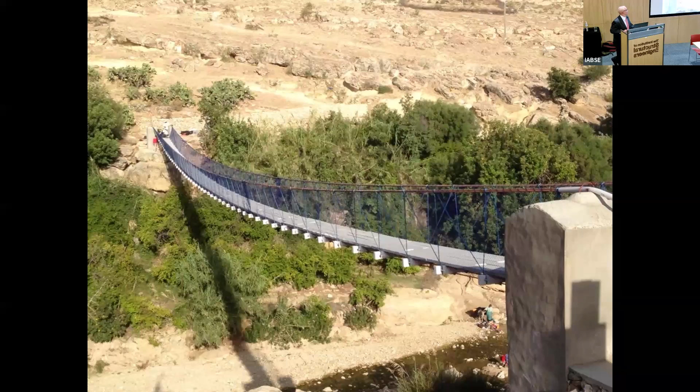So now, and I'm really near the end. Now I'm wondering—that's slow change, and I'm thinking we're not well adapted. What about all these fast-changing things that are happening, particularly with climate change? What we're seeing all throughout the United States is very high localized amounts of rainfall that are taking out bridges.

This is the sort of fat tail problem. This bridge in Texas was the 250,000 year return period storm. I think we're nonsensical at this point when we say such things. Yeah, we have a problem, and we are not going to be able to fix it, in my view.

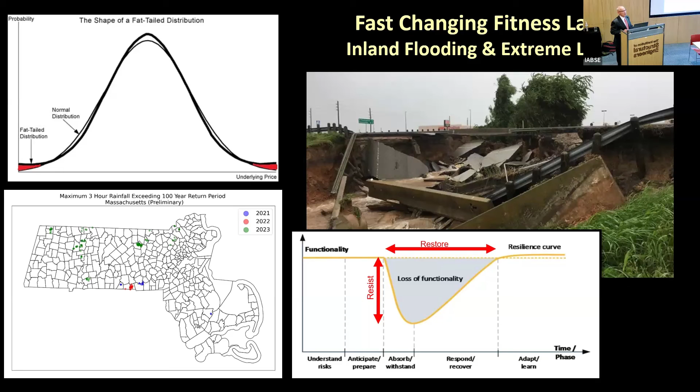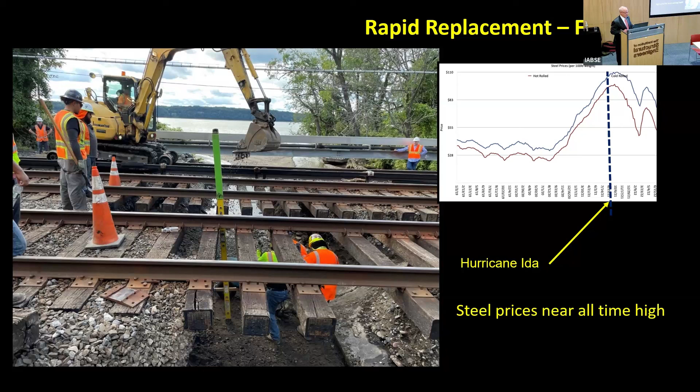Part of it is really focusing on rapid restoration. I've now done a series of projects, and this is on cultural transmission, or you could say the imitation side of things. I'm completely interested in using filler beams, something you use here that we are absolutely not allowed to use in the US. So I have to wait for these emergencies before I get the right to play around without recognized design codes. This is an example of a filler beam bridge we did in New York City.

The other problem we're having all over the place is vehicular impact. All we do is have over-height vehicles run into bridges. This one is actually one we fixed - we spent $1 million fixing it, and it got torn again. It's just absolutely ridiculous. We fixed it 2 years ago, and it got hit again. So finally, we were able to enhance the clearance and have a much more robust structure with filler beams.

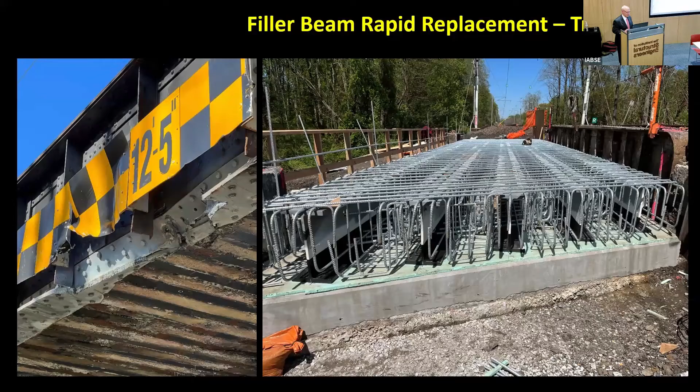The last thing I'm working on is bolted up stuff. I got very interested in using workflows from transmission line manufacturing or transmission tower manufacturing. This is the bridge - not a weld to be found. All I'm doing is brake press bending plate in Z shapes, like Zoli, things should have Z shapes.

It's that these guys have steel on the ground. No US fabricator has steel in stock. These guys, because they're making transmission poles, have steel on the ground, and my thought was, hey, I can use steel on the ground, say make this piece, and then respond more rapidly. We've now done a few demonstration projects with that technology.

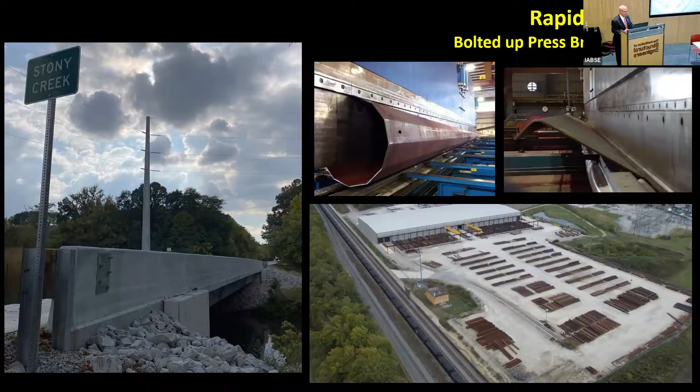The stuff that makes me nervous: tire pressures are getting heavier. We have significant orthotropic deck problems - we're having decks that are only lasting 15 years that have design lives of 100. We see significant problems with changing from duals to super singles, which, as I understand it, you guys developed here, so thanks for that. But we have a design code where the contact pressure is 40 psi, and we're seeing the steering axle at 130 psi. If you look at the way tires are being designed, they're delivering much, much higher loads. And this is my worry, that we don't have codes that can adapt.

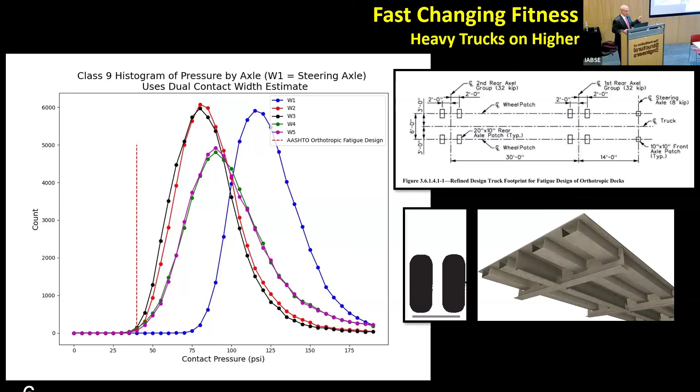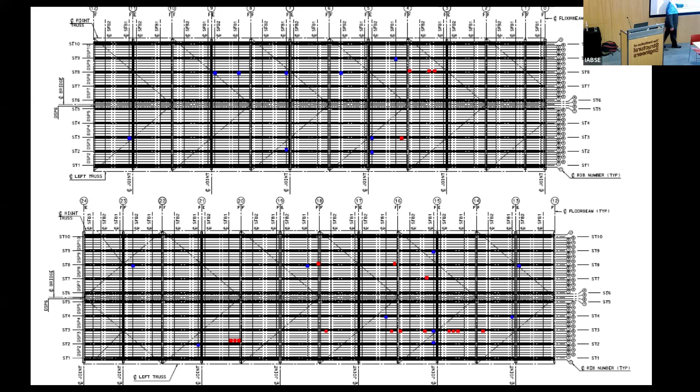The other piece of the problem is we have lawlessness in the US, as you might imagine. The legal limit is here - you can see how long the tail is. We have grossly overweight vehicles. And not surprisingly, we have brand new, I say brand new, less than 20-year-old decks with fatigue cracks, all in the truck lane. All you see is rib to deck cracks and floor beam cracks. I'm worried that every orthotropic deck we build is going to have this problem until we change.

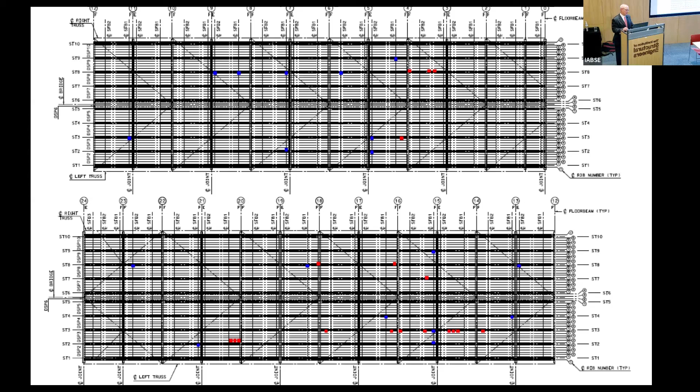And we do all these tests and so on. And then obviously this idea about vessels - if we have a bridge collapse, why would we be surprised, right? The codes aren't able to adapt quickly enough.

In the end, I just feel like this idea of adaptation has become inevitable. There's a lot of slow moving change that we're not reacting fast enough to, and a lot of fast moving change that I'm really concerned about. For me, my career has been on fabrication, transportation, erection - all of the innovative things I've done are in that space. And that, in my view, is 50 years too late in a sense.

I say this all the time: we're leaving this next generation with much more challenging times, with much more rapid change. This is where this idea of innovating versus imitating comes in - I'm afraid we haven't given you much to imitate, and we have a lot of learning to do. I think that logic is really, really important for you to hear, especially you young people.

For me, I think the tail end of my career, I'm really trying to focus on smaller span bridges and the larger problem of being able to rapidly respond to events that we won't be able to address. Thank you.